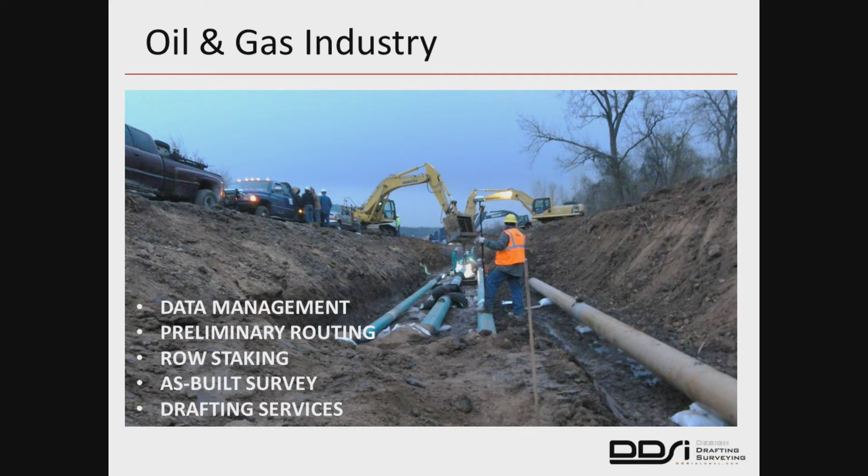I'm going to talk a little bit about some of the workflow we do to complete some of our products for the wireless industry. As Randy was saying, we work in a few different key sectors, one being oil and gas, where we primarily do data management, preliminary routing, right-of-way staking, as-built survey, and drafting services for that sector. We also do wireless telecom, which is what I'm talking about today. We work with a handful of different architecture and engineering firms where they sub out their contracting work for the survey they need to greenlight their projects.

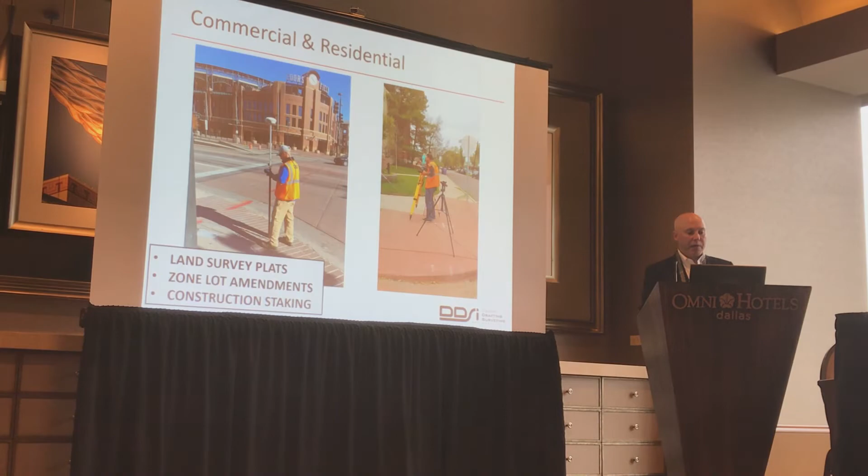Going a little off the last presentation, one of the main things is we tie down right-of-way parcel boundaries. That's one of the first things we have to do, look into that for the boundary. We also do commercial and residential work. I threw in a gratuitous shot there next to Coors Field of us doing some survey for a downtown project.

What I'm going to go over today is pretty much the technology that we employ to do the project. We've got one project in particular we're going to talk about, the case study itself, applying the high accuracy technology we're trying to incorporate with all of our field tools, pulling it all together with GIS, and then I'll briefly talk about some high accuracy technology trends.

Before I get started, this was going to be a co-presentation today. I was going to be presenting with a little more technical side on the GPS equipment itself, but he had a family emergency and could not make it today. So I'm going to try to fill up as much time as I can here, obviously not going over too long, but hopefully give you guys enough detail that we can have some decent questions afterward.

So for this project, here's the technology we employed. For the GIS side, we are using ArcGIS Online, ArcMap, ArcGIS Pro, CAD, Civil 3D. For the GPS systems, we were using the EOS Arrow Gold system and the Trimble R8s.

The real-time correction we use is a virtual reference station. In the Denver Front Range area, we're lucky to have a couple different VRS systems that are publicly out-facing, which anybody can tie into and use, where we're able to get real-time corrections, essentially sub-centimeter, from these providers at no cost. So that's a real key. That ranges pretty much all up and down the Front Range, which helps us out.

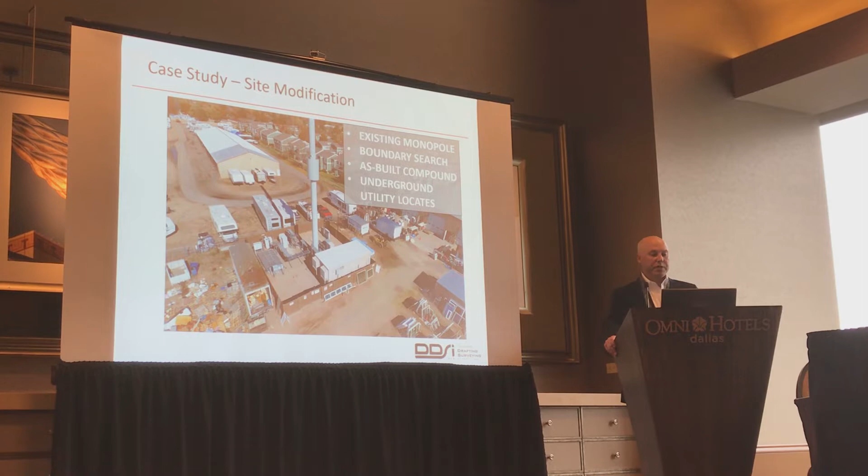So this is just an overview of where this project is at. This is what we're looking at here, the compound center with a monopole.

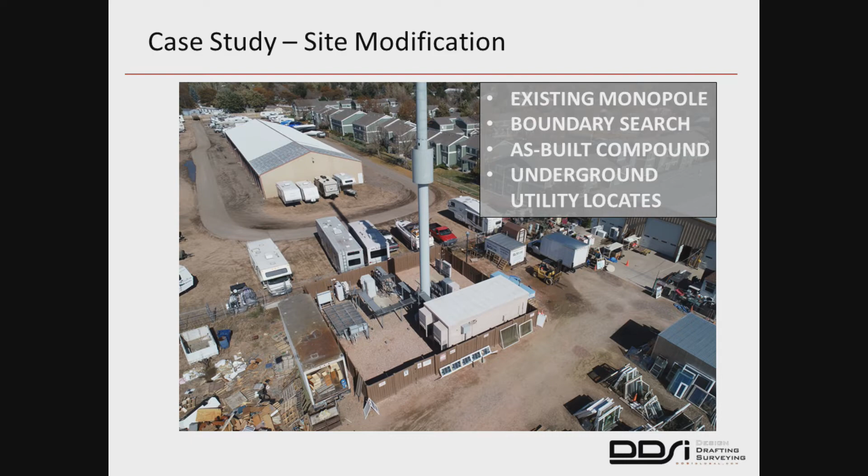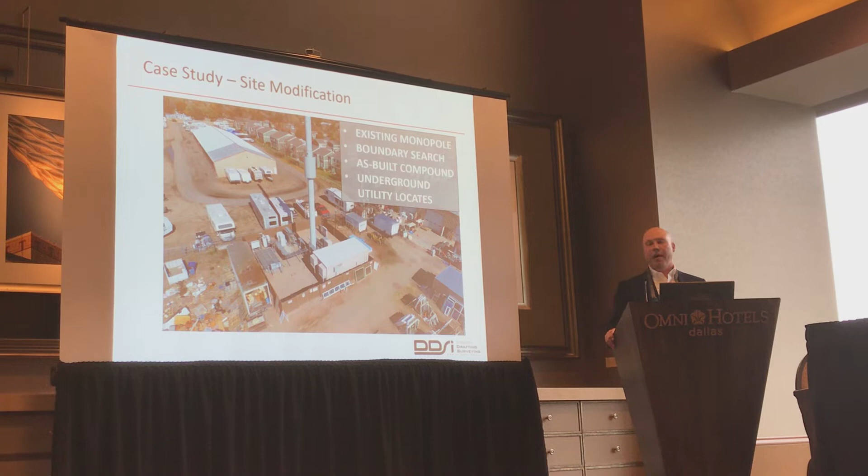The scope we're looking at was we have to do boundary search, tie down the parcel boundary, then we as-built the compound, going and doing topo for all the existing permanent structures on the property itself. The other key is underground utility locates. That's not required for all jobs, but for this one they needed the locate to see where fiber was running in and out of the property. That's something we contract out as a side, so a private utility locate company comes in. That's not a service we provide. We follow behind them once they're done with the locates, then we come in behind them and survey it to add it into the deliverable.

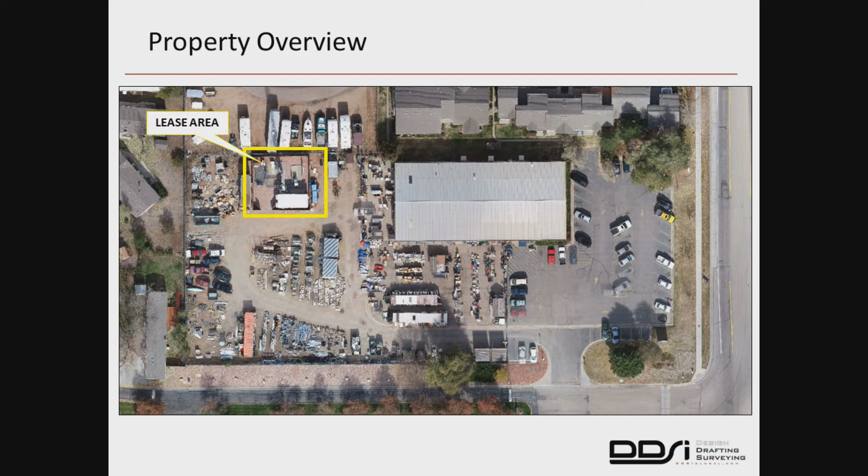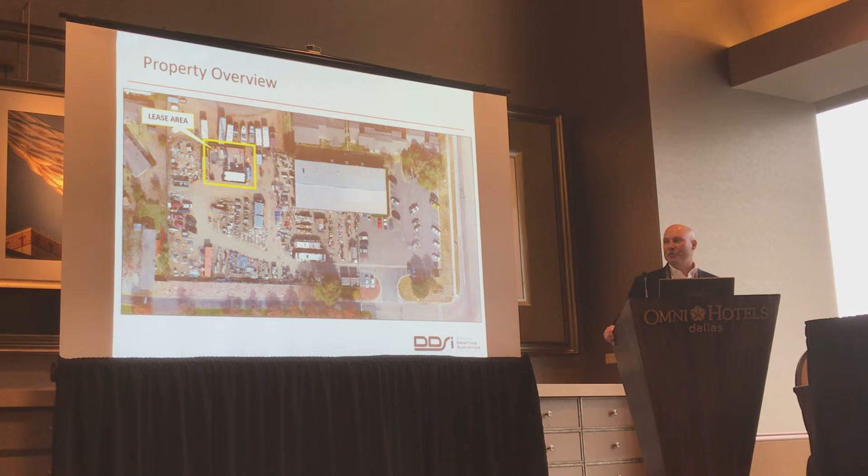Here's an overview of the area. This is some imagery we took with the drone. We got high resolution imagery, essentially 1.5 centimeter pixels, that we're able to use for drafting and QCing the data. You can see the lease area on here. This actual property is like a construction goodwill site where people bring in their leftover home improvement projects, tile and so on. As you can see, it looks like a junkyard, but it's not necessarily. It was very busy when we were there, but people come in and look for extra stuff for their projects or do-it-yourself work.

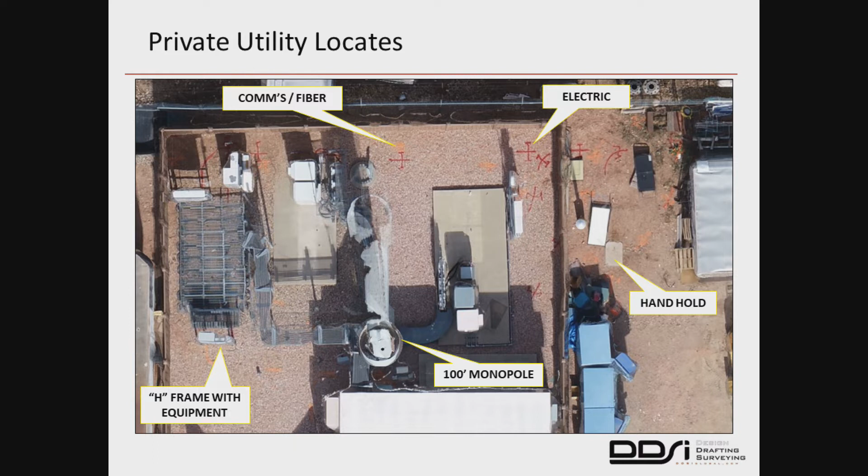So what we have is the comms highlighted in orange, so those are your fiber lines. We've got your electric, your power in red. We can see the handholds. I don't have a laser pointer, but you can see the monopole in the center there.

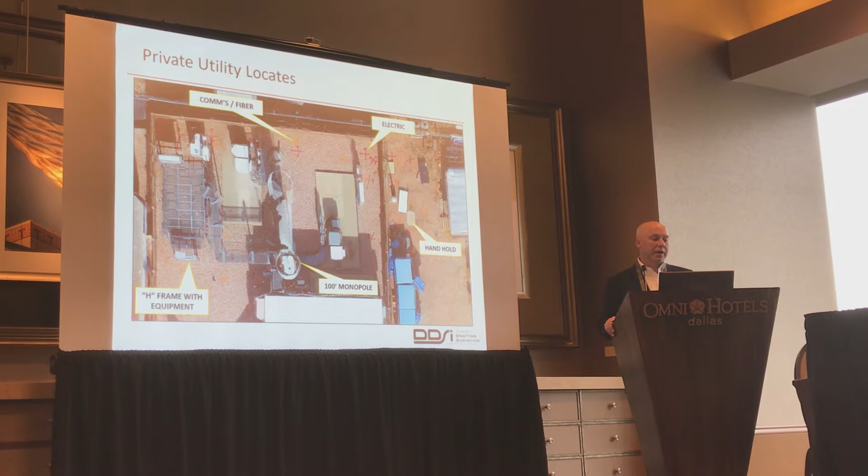And then there were 4 separate H-frames with equipment on it. So that's something else we needed a detail for the deliverable. They wanted us to shoot in where the H-frames are at. They're essentially trying to figure out how much more equipment can they put onto the site, how many more providers can they put in the same location, given the existing square footage and what's already been there.

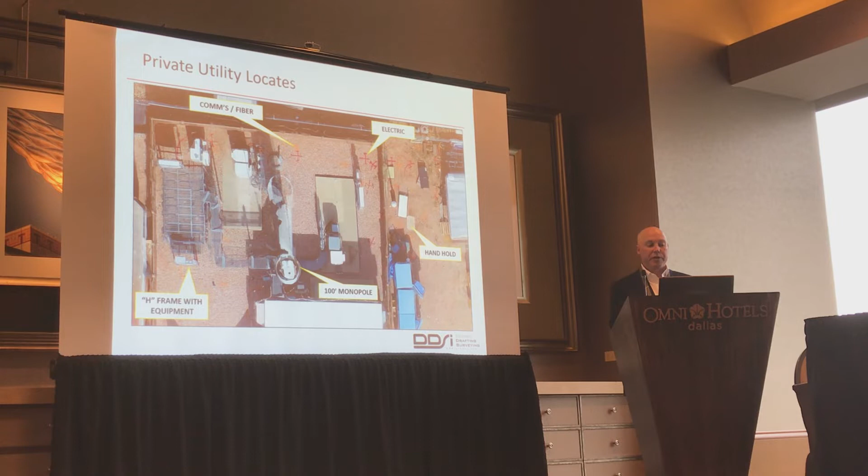So over here, this is the northeast corner of the property. This is where we started to run into a little bit of an issue for the field.

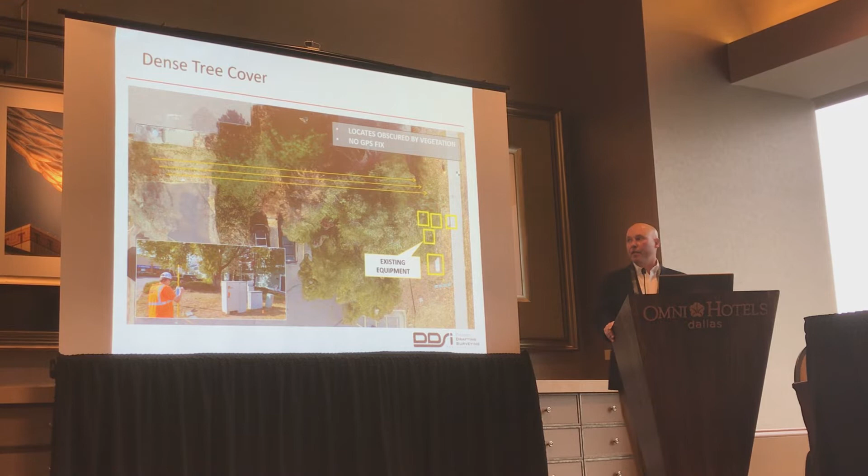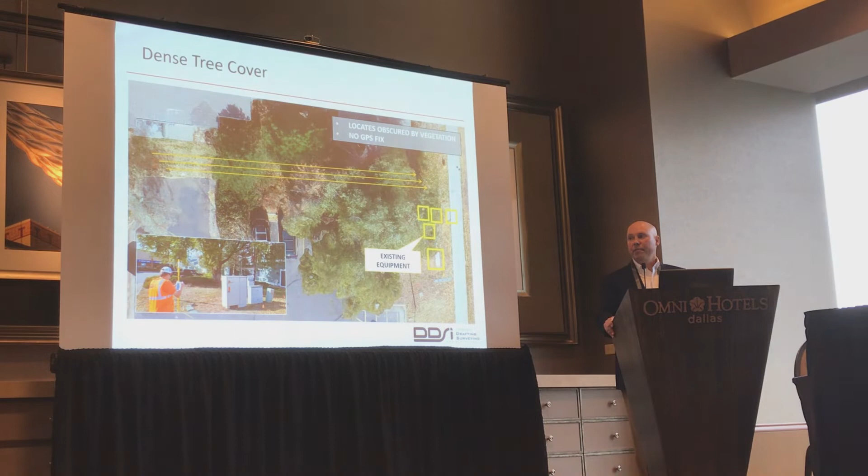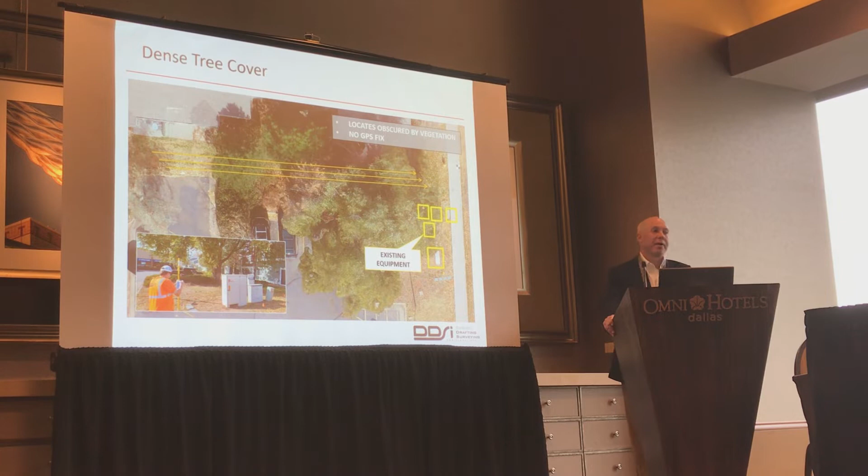I also have to point out that these jobs are tight on budget. So for the survey side, my goal as project manager is to make sure we get it done as efficiently and quickly as possible. We're not really allowed to go back out for a second visit, or take an exorbitant amount of time to collect the features, because that essentially blows the budget on the project. So we have to figure out what tools we can use while we're there, at the same time, to fit it all in and make it work.

In this situation, we're looking at multiple utilities under this obscured area, under the tree canopy. If we were going to traditionally just try to collect it, we'd have difficulty using our GPS equipment, which goes quickest. And then in the lower left-hand corner there, there's existing equipment that we need to also tie into the property, that we can't see from the imagery. So that has to be collected somehow to be accurately displayed in the deliverable.

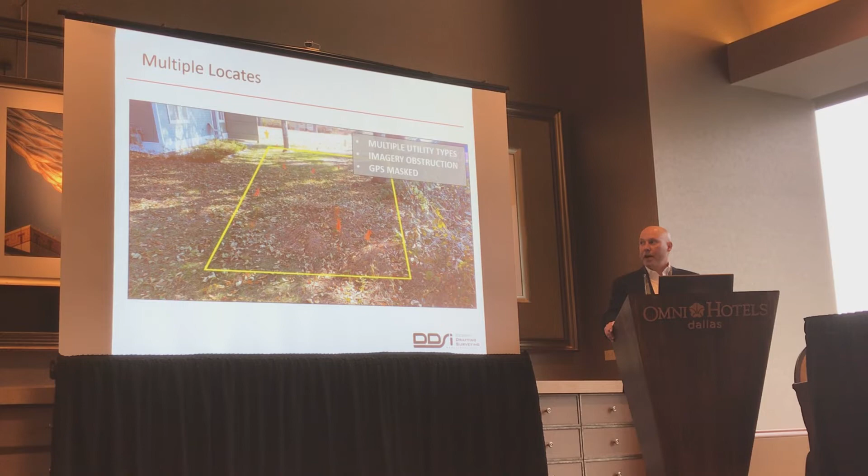So here's a ground view shot of that same area. We've got a multitude of flags, it's very confusing. There are essentially 4 different utilities here: a water line, a gas line, 5 different comm lines (3 in this section right here), and then sewer that starts over on the other side too. There's a manhole that you can't see.

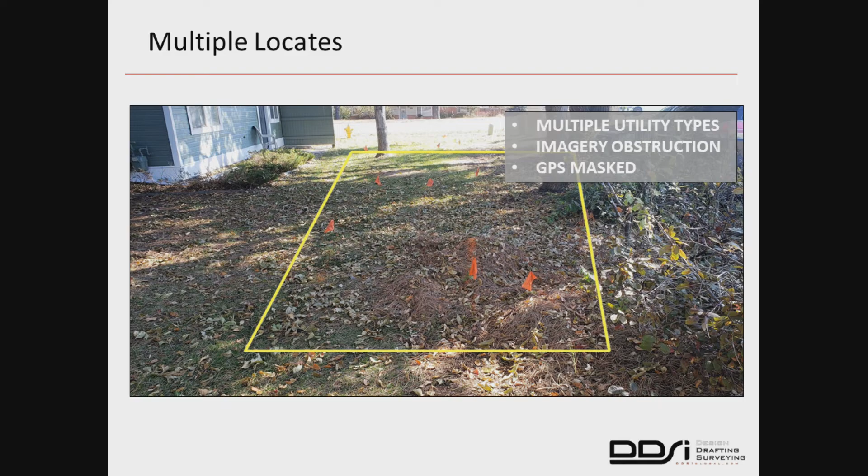So we have all these assets that we need to have collected, and our traditional workflow is to use GPS where we can, and then outside of that we go into our other tools that we have.

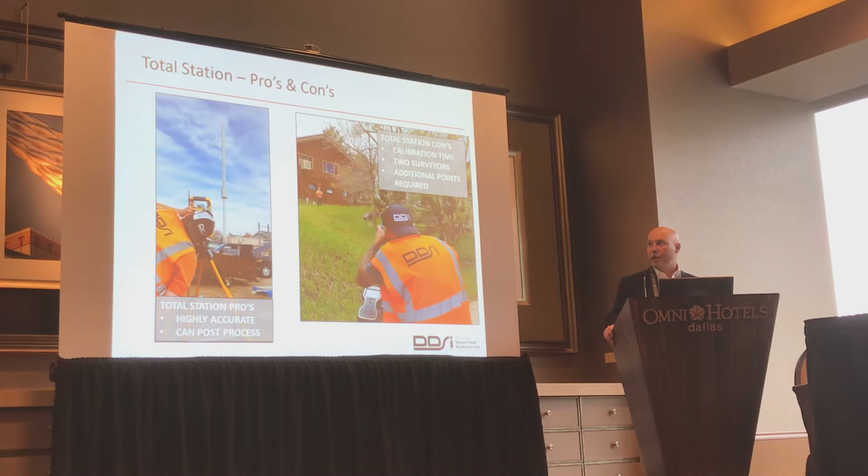So the first way we solve this problem is we'd use a total station. That would be our go-to tool. Previously on all of our jobs, that was the main point. Total stations are a great tool, so there's some good pros to it. They're highly accurate, millimeter accuracy, and we can use them in almost every situation where we can't get a GPS signal.

And we can post-process the data, so it gives us feedback on what we've gotten and how accurate it is. The cons though: calibration time, the amount of time it takes the crews to get set up and calibrated, requires both field guys since we have a 2-man crew, both people have to be used to operate it. And then you have to collect additional control points to offset the data, so you have to have a backsight, a checkpoint, those have to be monumented. You have to get a fixed GPS signal on it for 180 seconds to really tie it down, so it takes a lot of time.

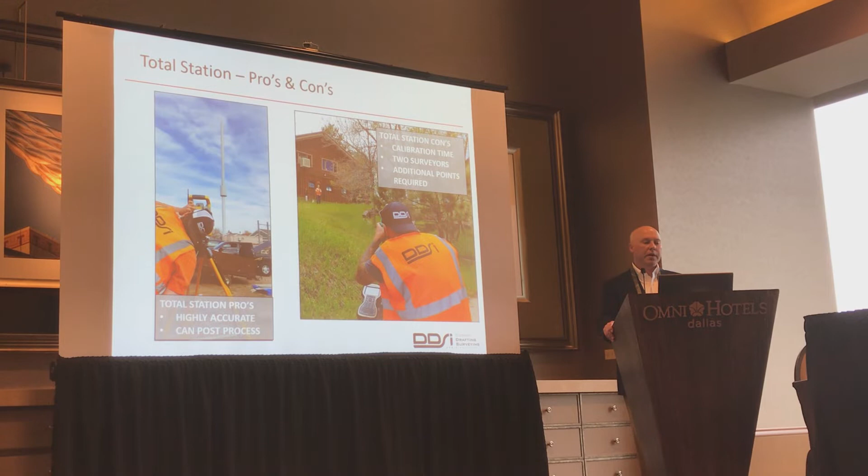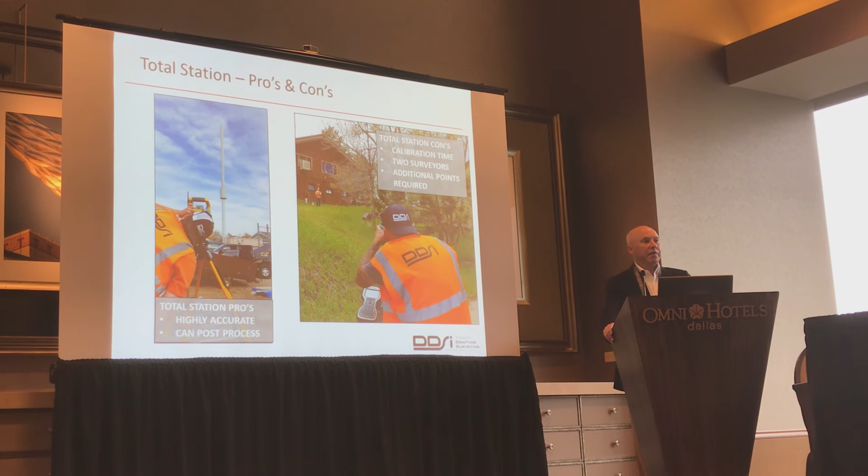Over on the left, that's the monopole, so we used it for this scenario to get an accurate elevation of the tower itself. But to take that same piece of equipment and traverse it over to the next spot and reset it up, it's a lot of time. So I've been trying to figure out ways to make the whole process go more quickly.

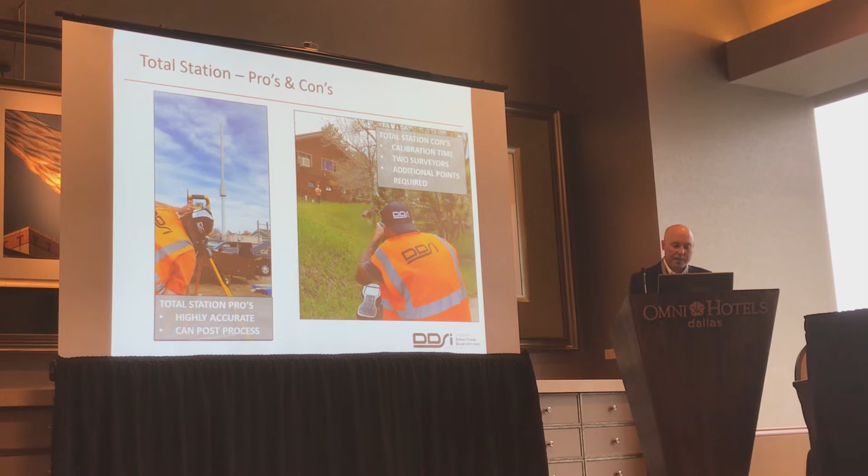So here you can see where we've got into the same area, and we're essentially going to be starting what we tested out and put into use on this job, the new laser offset routine.

I've used laser offsets in some of my other jobs, and it works out really good, especially if you're doing one spot to shoot to many. But this new routine that we have with the other tools, especially the new laser we're using, we're getting great accuracy out of it for the thresholds we need for utility locates.

So they paint on the ground a 1-foot swath for your fiber. If we're getting, let's say, 1-inch accuracy, that's well beyond the threshold we need to collect that asset. Boundary, setting pins, range points, things like that, we're not using it for that, but for a lot of the topo work we need, this works as a perfect tool, and it gives us 2 rovers at the same time instead of just having the one standard unit.

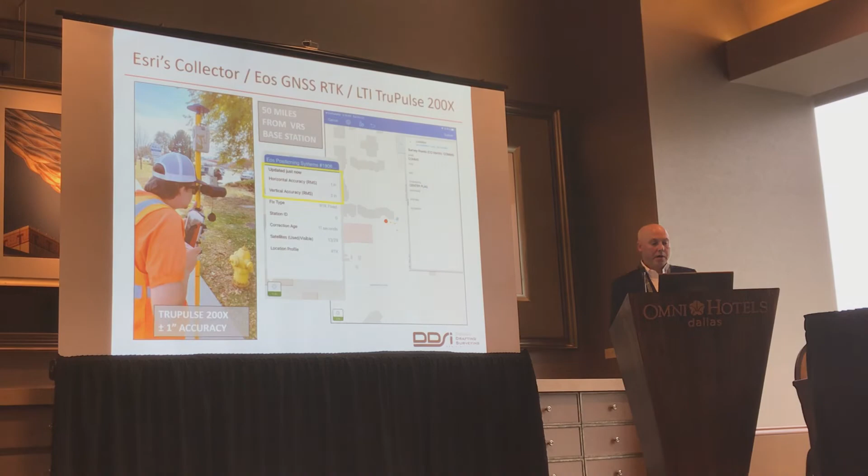So you can kind of see there, once again, the density of all the locates there with the flags coming into all the different cabinets and equipment. And then here, just essentially showing how this now just ties into collector.

So this is something new that we started to use this year, since they've been able to essentially tie in the offset routine that's directly into collector now. So no custom coding on my end or any of the analysts to have to make this work. We're just using collector right out of the box, where we can essentially get the basics for what we need.

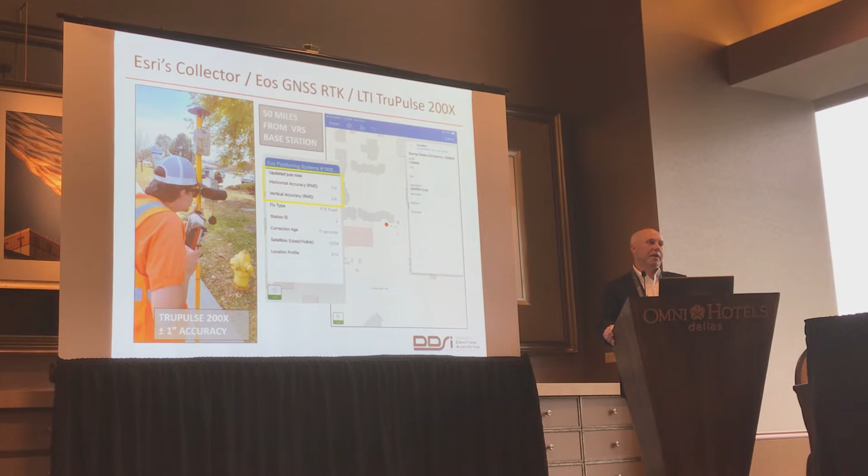The use of the base maps is key as well. It gives the guys a lot more detail that's very easy for them to see, where they can flip between the aerial imagery and that topo base map, which is pretty much the go-to standard. It allows the points to stand out.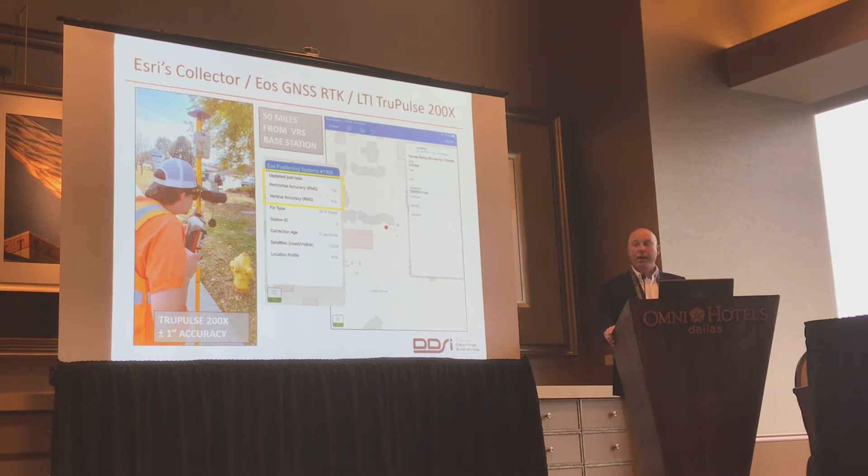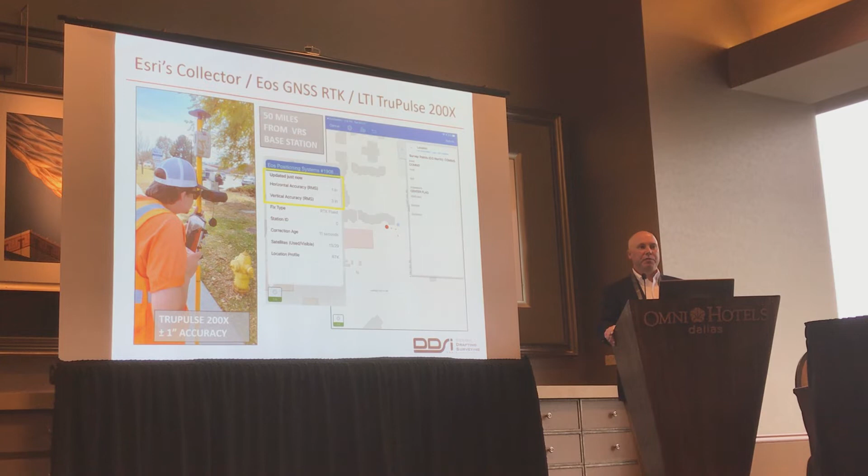And then what I want to note on this slide is that we got, so that's our accuracy there, tied into that same VRS system. So we're at like the threshold of about 50 miles from the actual base station itself. So it's pretty much pushing the boundary for how far we can go out and still get accurate real-time correction.

So you can see that we were right inside collector to also bring up some real quick heads-up feedback for the crews. They got 1-inch accuracy on their horizontal, we got 3-inch accuracy on the vertical.

And then once we did the actual offset, and then we kind of did the Pepsi challenge, we were within 1 inch of doing the offset routine for that same feature.

So over on this side, we've set the first checkpoint, and then the red dot is actually the second point, and that became our offset right there. So then we're under the canopy there for that first one.

So I guess before I go into too much further on that point, there's 3 solutions that you can use for the offsets that they have standard right now. So the first one is the range azimuth. This is a single point, and this is where the azimuth, that bearing, is being taken directly from, let's say, like a TruPulse 360. So that device has that built into it.

That's a great tool, especially if you want to shoot something in the middle of the road like it has there, if you need like a manhole or a water valve or something along those lines. It works perfect for that.

The range triangulation, just taking 2 points, shooting to the same spot. Software does the math for you, and then you can use that to then create the offset.

And then we have the range azimuth backsight, which is kind of like essentially a total station with a slightly lighter setup, let's say, where you still have to set a backsight to it. So you have to do a little calibration to let the unit know where it's at.

So in this case, for this project, the range-range solution works the best, because the crews can just keep moving. You can keep moving to point. We don't have to reset up once again, set up a new backsight.

And essentially that's the most accurate of the 3 routines that we could get, that essentially imports the least amount of errors, the least amount of variables to come in from that routine for us to gather the data.

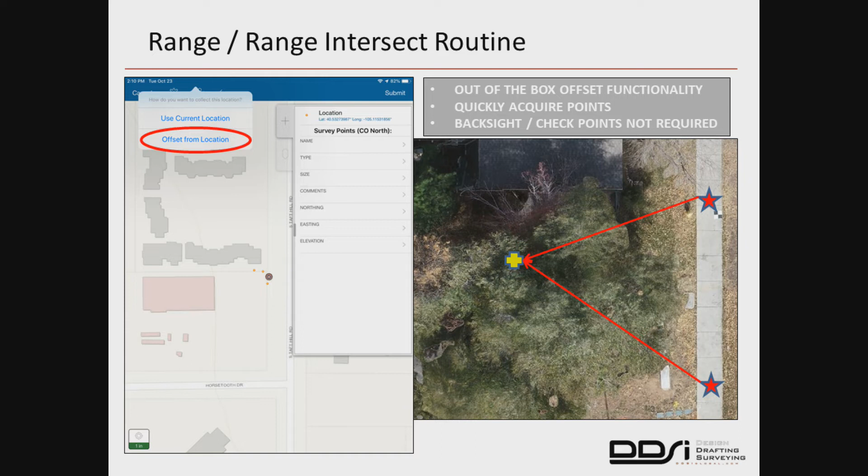So here's just a real brief example of how we're using the range to get those same points. Once you've acquired your first location in the collector, at that point it now gives you the choice to offset from that same location. And that's essentially it. So we go to offset from there, we choose our first point, and then you can see how we triangulated over to that one spot.

Essentially those are the 2 points that we occupied.

And then from there it switches over to the Eos Tools Pro interface, where the actual offset math is done outside of Collector. So we essentially go back into Collector, do the two checkpoints from either side. Once you've got those two points occupied and you've shot your offset, it then gives you the choice of which of the two points, triangulating between either the east or west side, whichever one was your point.

So you can kind of see there at the top half, it landed right where it was at. And down here in the lower side, those were the three flags. So we just shot the top of the flags as our point to call out, and it made it easy.

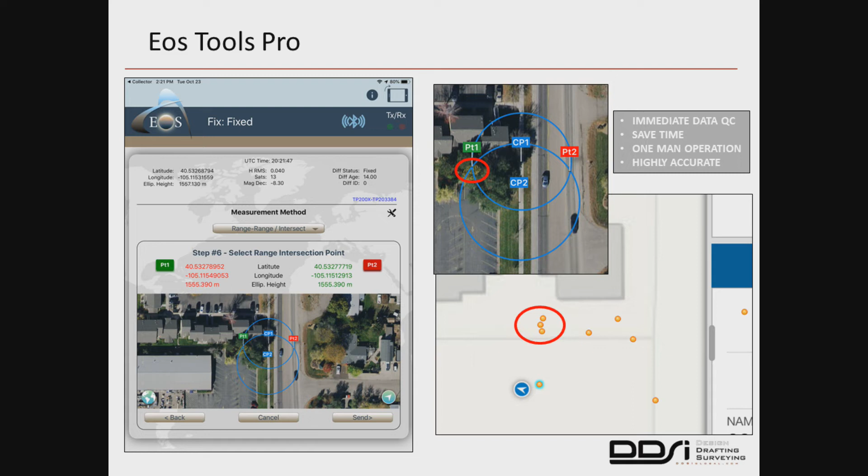They don't always set flags for us, but what they did this time turned out to be a big help, and they were right on. You can see there, it was essentially the same width they were at. It worked out to be a perfect routine for that offset.

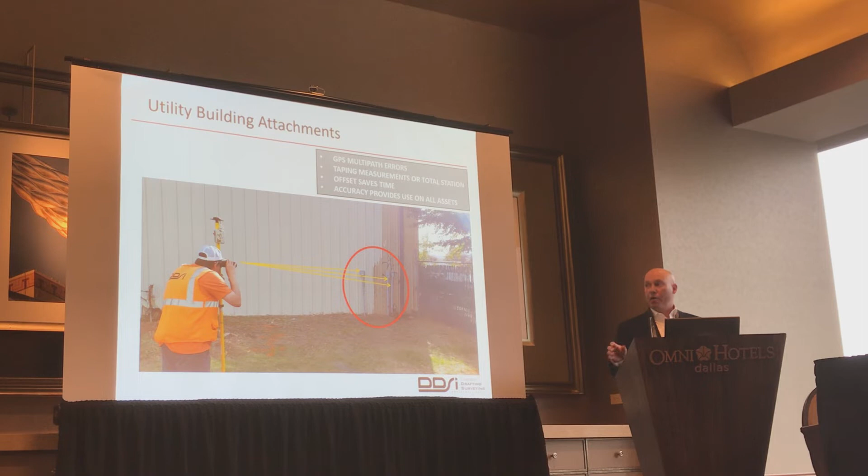So the other scenario where we utilize it on this project is for utilities attached to the side of the building.

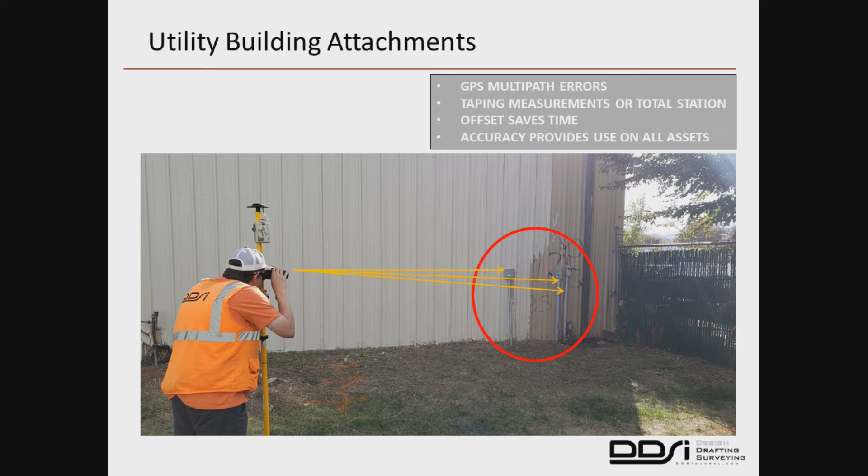This scenario also traditionally gives us problems when we're out in the field to capture these utilities quickly. Once again, at this point we would either set up a total station, stand over there with the rod, shoot each one of those points, and move on to the next points.

But now with this system, we were at least able to go shoot all three of them, stand off to the side, because the other issue we get is multipath errors.

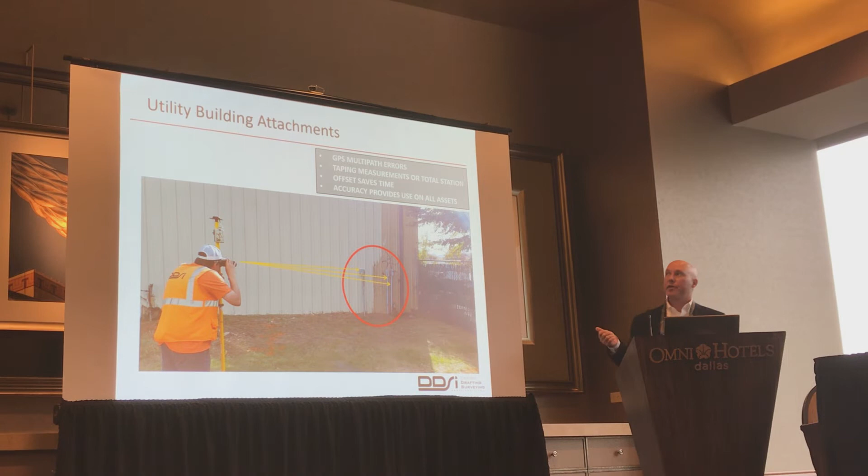So we do some small cells as well, and if we're sticking the pole up next to the utility pole itself, we've noticed problems where we get multipath and the point shows up out in the right of way, not where it's supposed to have been.

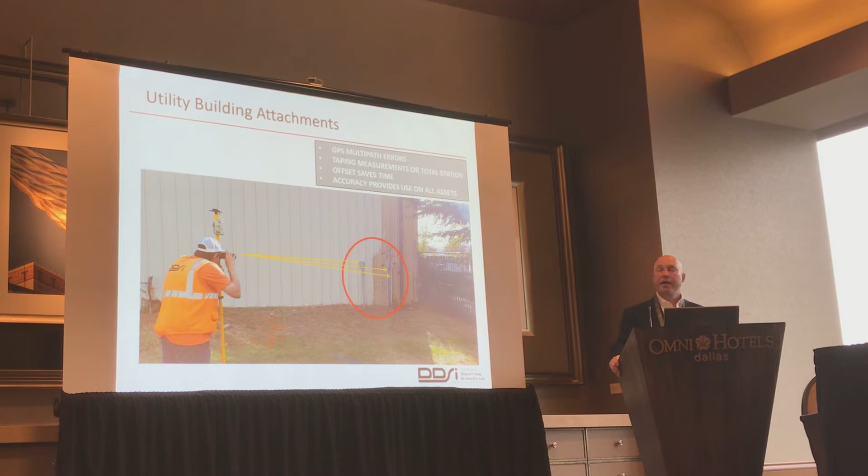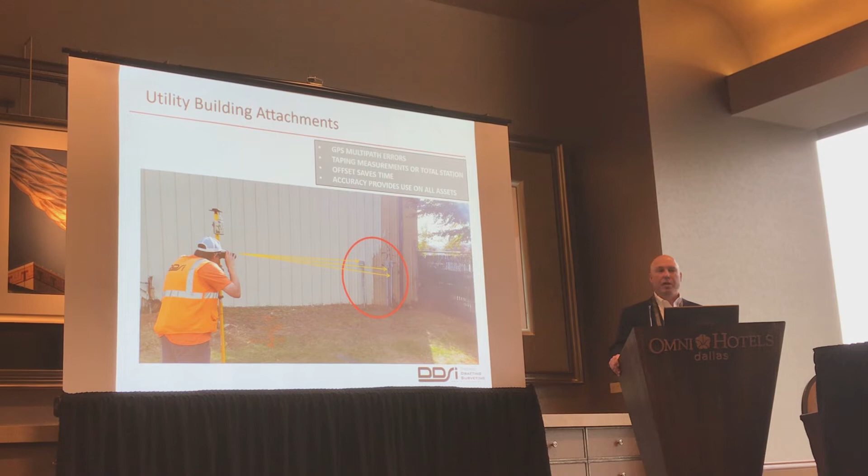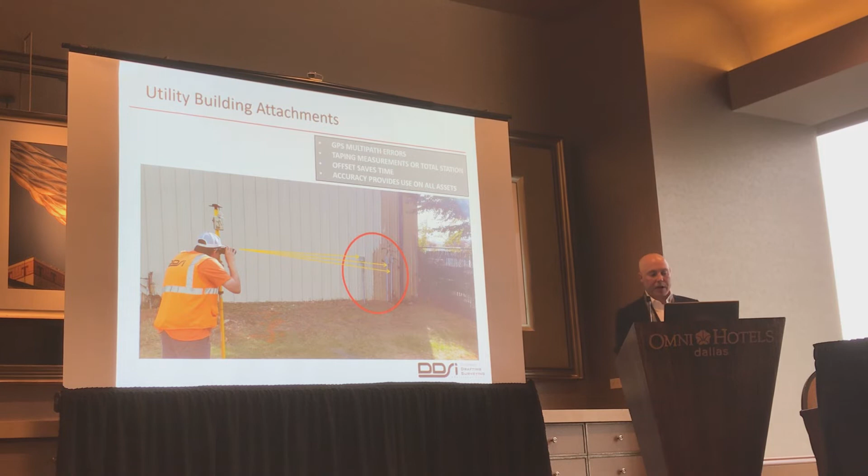And there's not a whole lot of QC tools that we have in the field for the guys to look and say, hey, does this look right? Do we need to shoot it again? These guys are trying to go as fast as possible and be as accurate as they can, but their whole mission is to go quickly to get the job done efficiently.

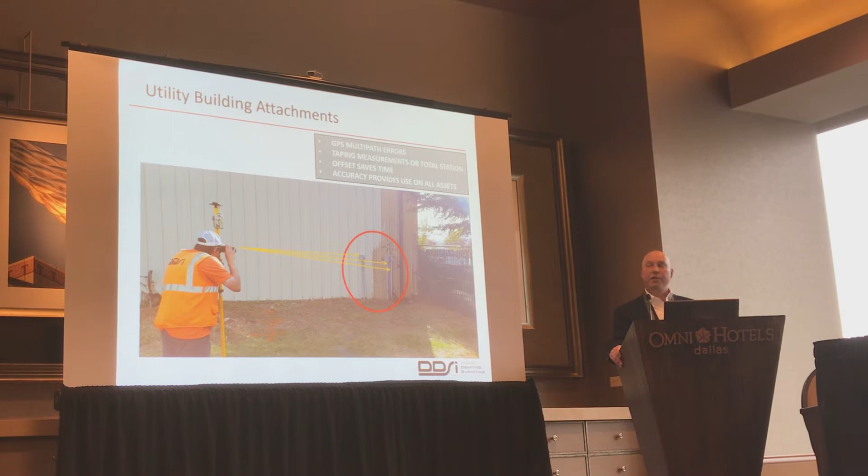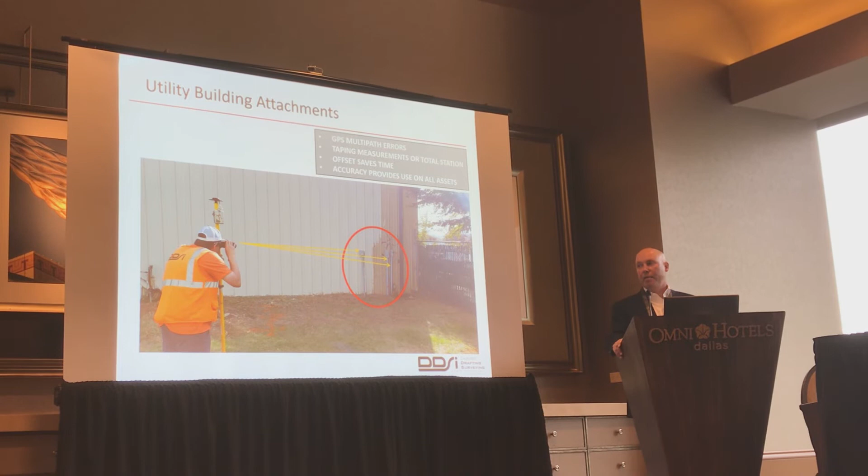So for this scenario, the other way we'd solve this problem is that we tape in the building. We'd take our field notes with a field sketch, manually tape off the building, measure the outside corners, and then start to measure in assets from inside of that. That document gets scanned, goes into the project folder, and gets passed out to the drafting team. The drafting team takes that and has to decipher what they were trying to say.

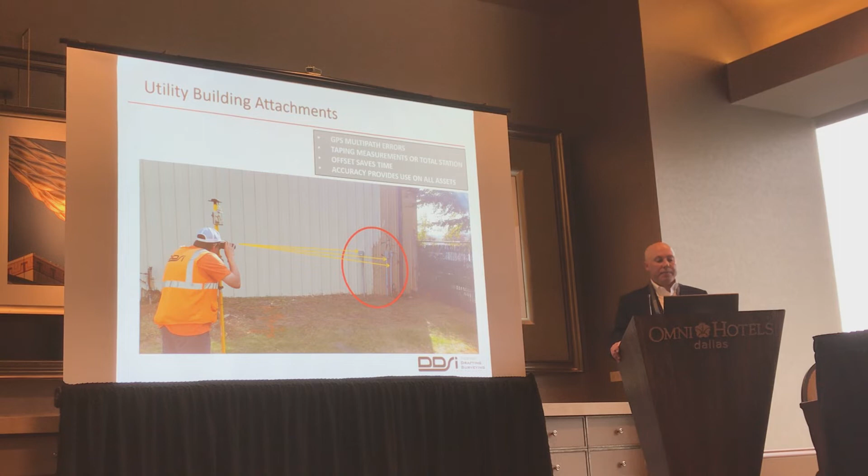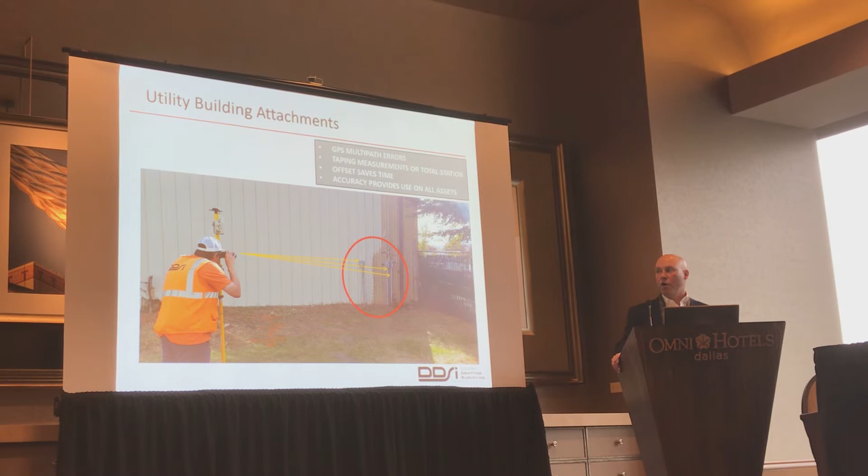Which asset were they talking about, put that into the drawing, and that also takes a lot of time. Obviously they like to work with points and lines right out of the box, it makes it easier for them. So taping it is something we use as a plan B when we have to. But if we don't have to, instead of walking around the building doing all those manual measurements, this is a big help.

I want to note on this one, there was a lot of vegetation on that side as well, and the guy I was working with that day immediately picked up on it. He said, hey, this one didn't land on the side of the building, because he was shooting through what was essentially the side of a bush, which was our only other angle. So he picked up right away that it didn't land where it should have.

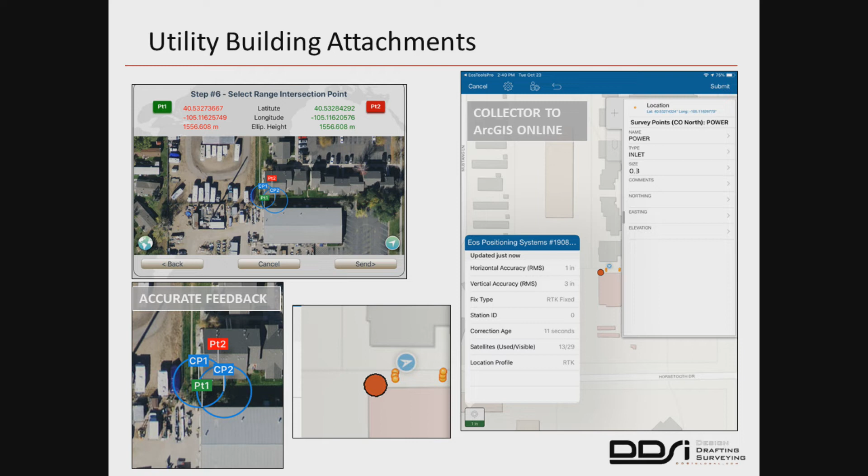So you can see there, it's almost right on. This is, of course, not our imagery, this is the imagery coming down from Esri and from Google. And the point still from the third-party app shows up in the same spot, so you can see our offsets there. He knew right away whether or not it was right.

So that saves us time, because normally that would not have happened. He would have shot it, it would not have been accurate, we would have found out later, and then we'd have had to figure out another way to solve that problem.

And then you can see our other points that we shot. Those are the same three utilities that are coming over to the side. So it really helped out quite a bit.

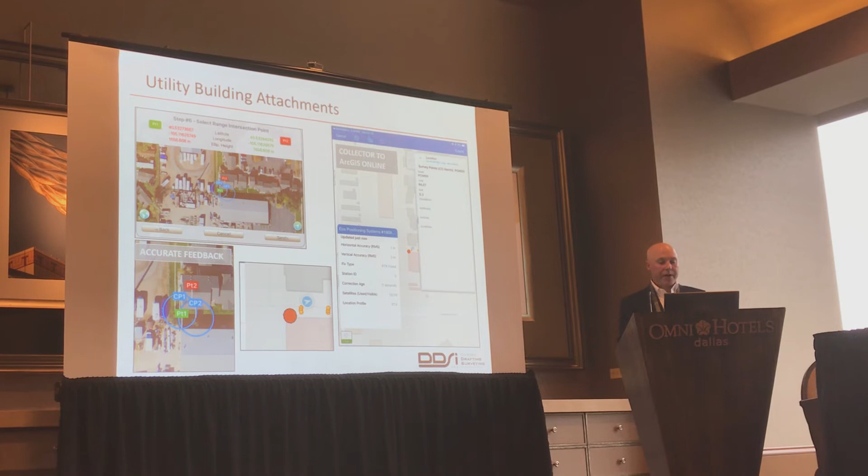So then from there, we push it up to the cloud. We're using ArcGIS Online to then store that. We have it hosted there just for ease, so we have our project data from that point.

And then from there we can directly import it into Pro or from ArcMap, within our own portal. Take those same points that now it's synced there, pull that back in. We can ETL it out of there into the different data types that we need, so we use file geodatabases, shapefiles, CSVs, Access.

So all that can then be directly downloaded, something that I don't have to do for them. Anything that I can do to eliminate people asking me to download or create a shapefile for them is a huge help on my end. Any of that stuff that they can self-do for themselves if they need in that format, and it's just essentially a right-click or a download away from them, is a huge help.

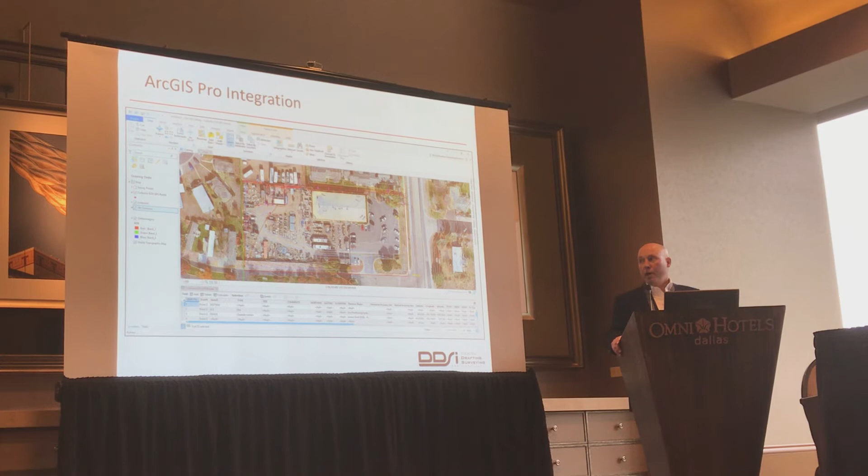So from there, we can bring the drawing back right into Pro. In this case, we're looking at almost the finished product. So what we've got is our boundary in red, so there's our locked-in boundary from traditional survey.

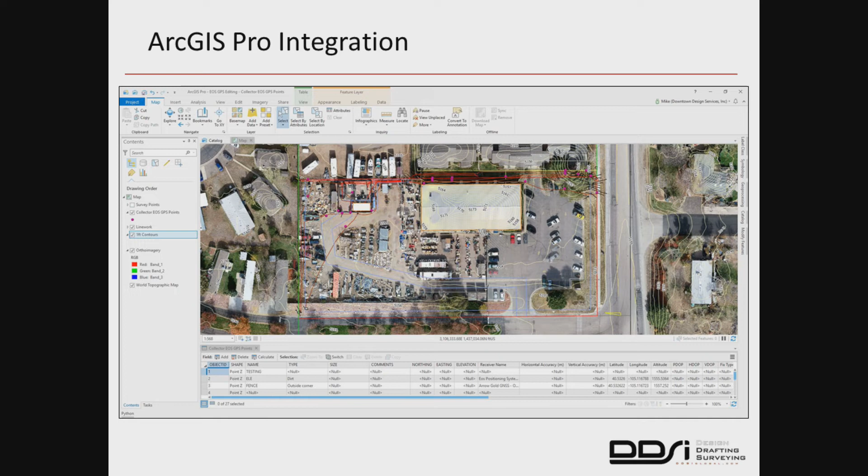We've got our 1 foot contours that we brought in from the drone. That's overlaid with the utility locates that we have along the west side of the project and the north side, so you can see the density there and all those running into the compound itself. Our high resolution imagery that we captured from the drone, lay that over there.

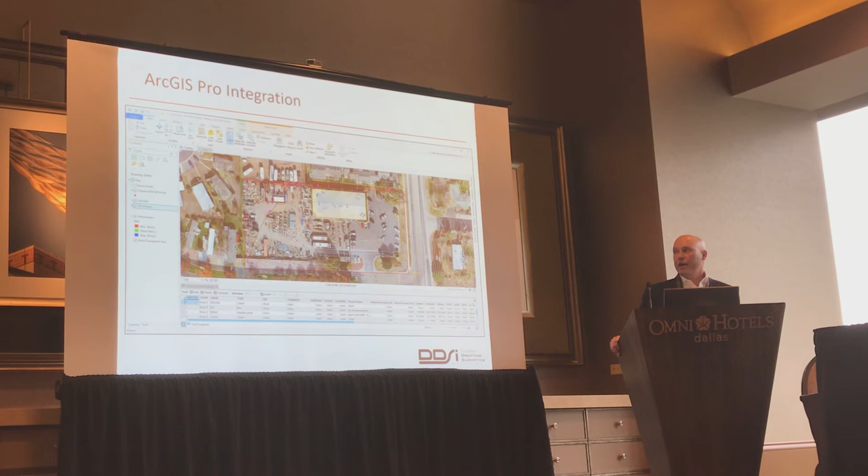So this gives a great reference and a good deliverable for the client as well that they can use to do some design from, because they're working off of just open source, all the same free sources of data for their imagery. So that's something we share back to them as well, because then they can use that to bring it into their programs they're using for design.

So here's just kind of a blow up of that same area, so you can see how everything pretty much lines up pretty tightly. So we have our easements drawn in, so we have the new access and utility easements that they're going to use to access the property.

The goal is they want to figure out where they're going to pull more fiber, right? So they want to have more bandwidth, more fiber. Where are they going to pull that from? What's the best location to do that? If they're going to bore, which side are they going to go from? Are they going to go from the utilities on that side, on the south side, or over here in the northeast corner?

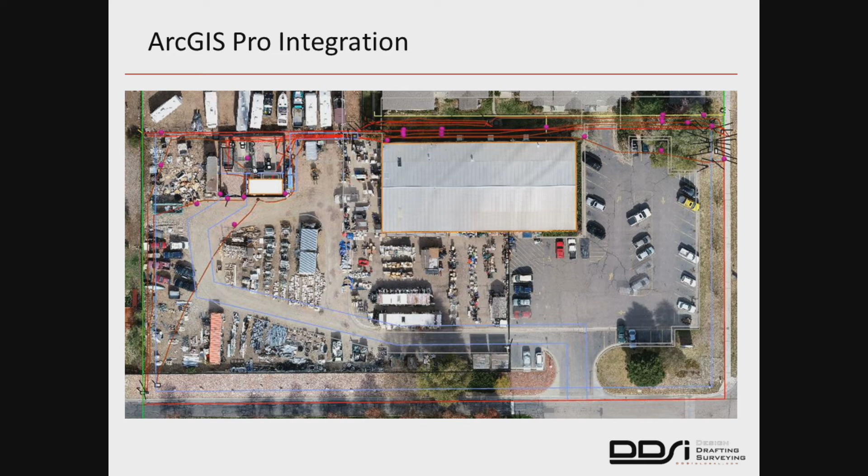There's actually 4 different pedestals in this project. You've got one in the north in the middle, and there's another electrical box on the far northwest corner. So pretty dense with the utilities that are coming in there. But having the data line up in that format is extremely helpful.

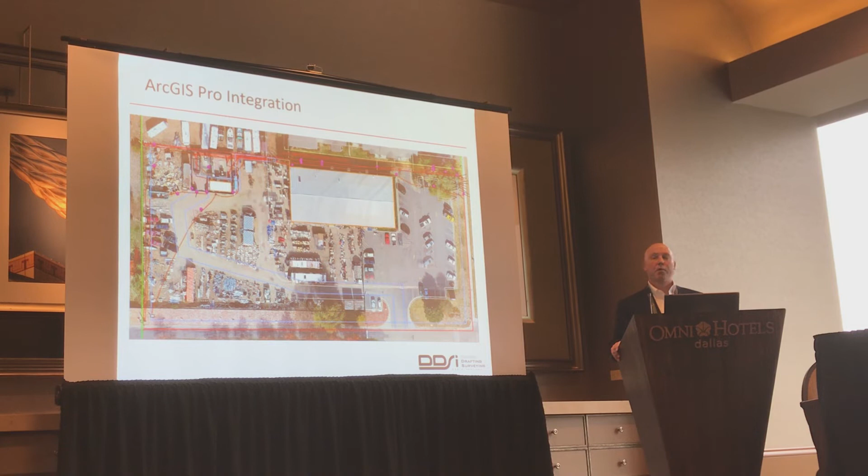And essentially, it's all drag and drop. I brought it in from the format that it was originally put in. Once it's been processed, outside of doing the imagery and that side on a one-off, everything else was drag and drop. And then we essentially get to do our deliverable.

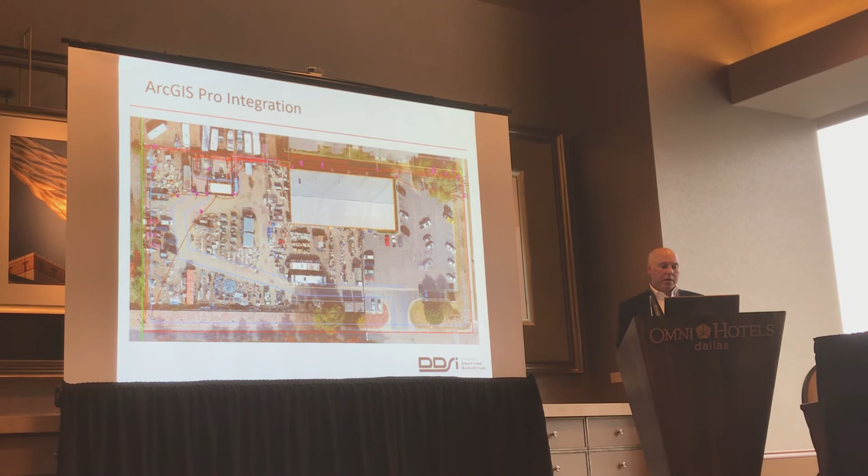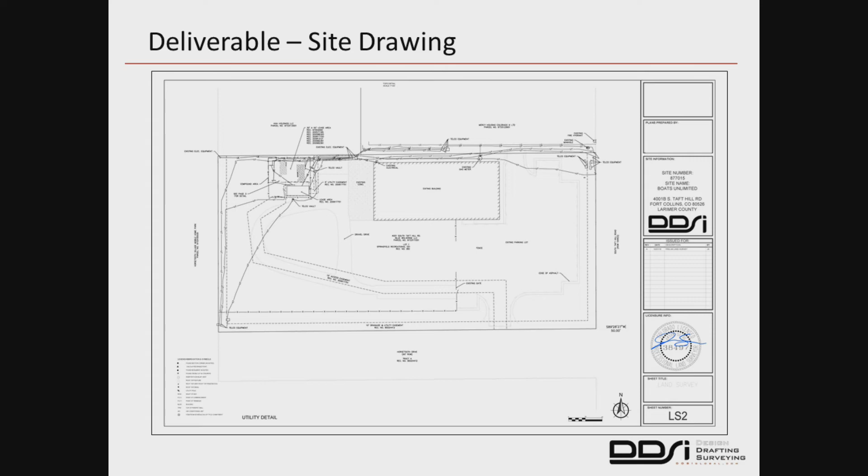So this is 1 page of the 4-page document that we deliver. This is the site detail that they need to check the box in order to get the project accepted. So we normally have a parent parcel that just describes the right-of-way, where we've tied that down so they know exactly where the right-of-way begins and ends on the property.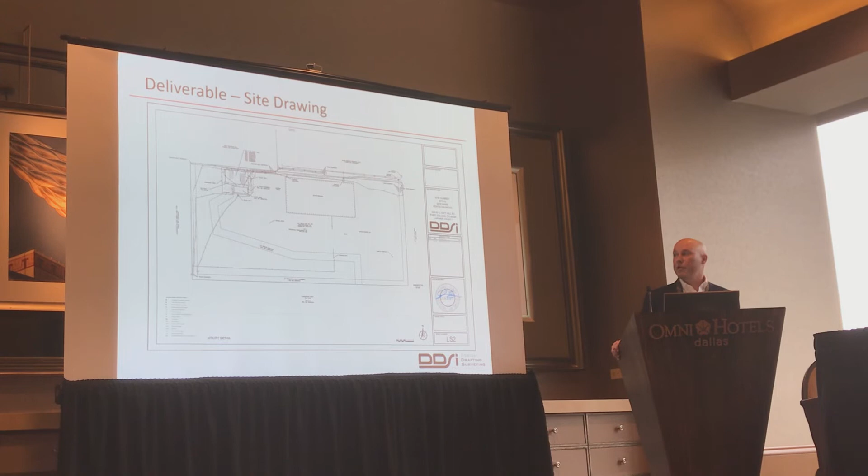So when we write the legal descriptions for the lease areas and the utility and access easements, all those are accurate. We don't get a lot of pushback from a lot of the local governments that we submit these to, or that the architecture and engineering groups submit these to.

And then once going through the title commitment, any other easements that were in play on the property, those are also shown on here.

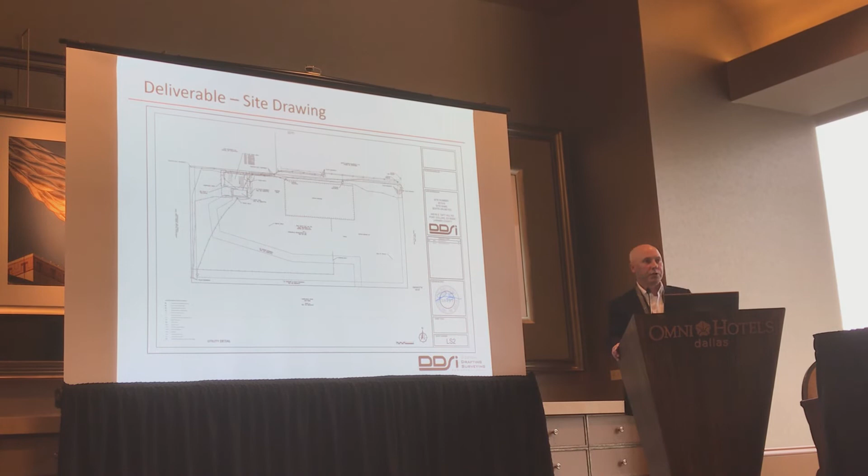I've been trying to test this out, trying to get this working, because as a traditional survey we're only using pretty much one platform since I've been on board to collect our data. So I'm trying to integrate this to give us another platform to work with.

That's the other thing too - now we've got so many more satellites we're hitting with this. It's giving us a ton more base data to work with, tying in our receiver to be even more accurate. So let's do the math on that real briefly.

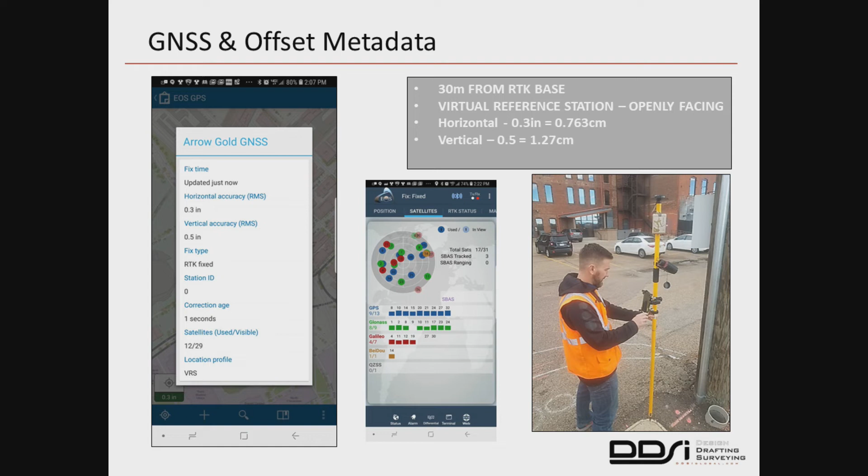So we're at 0.7 centimeter horizontal, 1.2 centimeter vertical. And once again, this is all real time, all free, no coding. I just plugged in the data, then went out and started running it.

Yep, the openly facing reference station, which I said is lucky. If you have one in your organization you use, or you pay for a subscription, you can tie that in here as well.

What I wanted to show here on this slide was just a little tips and tricks. They offer a toolbox that you can essentially download, bring into Pro, to give you some additional metadata that you can import into your shots. So not only will it collect the GNSS fields automatically when it comes in, but you can also collect the offset metadata as well, and that goes right into your fields.

Essentially, all I did was create my feature class layer, ran the script to add in their essential base fields, then pushed it up to ArcGIS Online, added it to my map, and turned on the collector for the iPad, and then I was up and running.

It was that easy - no custom coding on my side again, because even though we just had a presentation on Python, I try to stay away from as much custom coding as I can. This is something I can point you to later if you're interested. It's just another way to get some additional metadata for checks and balances, if you have to pass off data on where it came from.